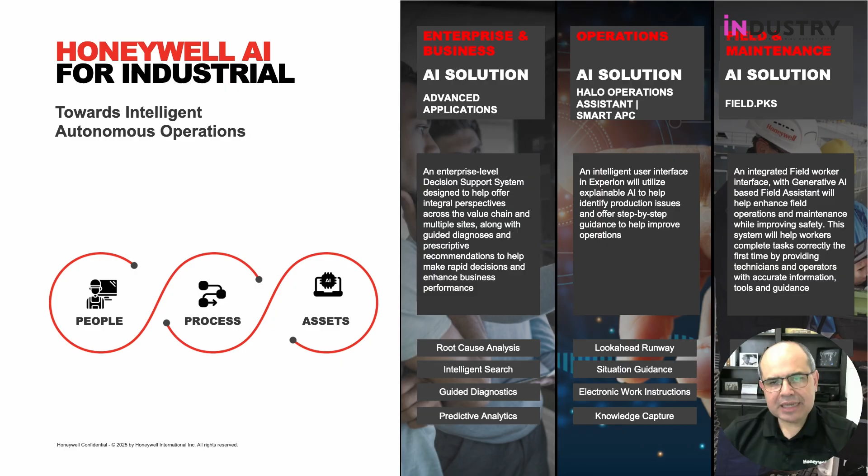What I want to do now is present some examples of AI-enabled applications that provide value for the field operator, for the control room operator, and for the engineer and managers at the enterprise level. Let's start with the field operation, and we're going to talk about one particular application called Field PKS, Field Process Knowledge System. Honeywell Field PKS is an advanced solution intended to support the work of the field operator and the field maintenance technician.

Usually, the operator, the technician, needs to go to the floor plant every day to perform what is called a round. They need to go and check on the status of the equipment, check on the status of the process, identify hazardous or out of normal conditions, and report that back to the supervisor. The supervisor needs to take this information and plan the job for the day and assign that job, whether it's a maintenance procedure or an operational procedure, to the resources available in the floor plant.

But to do this, both the operator and the supervisor require access to information from many sources. For example, they need to access ERP systems to see what is the plan for maintenance, check on spare parts and inventory. They need to access the real-time system to understand the status of the process. They need to go to several documents to look up OEM documentation, operational and safety procedures, etc., and many other OT systems related to maintenance and process performance.

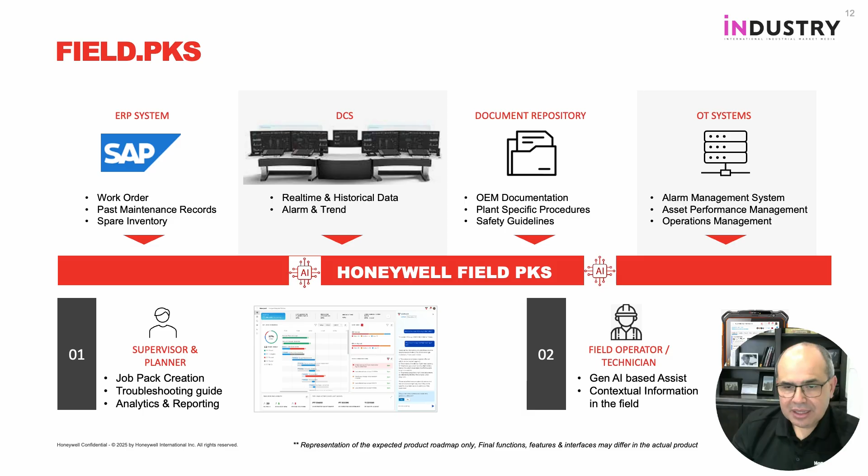What we do with Field PKS is we integrate all the relevant information for decision making from the field operation point of view. And we not only integrate that information, we do it in an intelligent way, in context. We contextualize the information and provide it in natural language to the operator, using Gen AI technology to process and contextualize the information, so the operator can interact with the application in natural language, doing intelligent search and getting the information readily available. We're going to see in a moment how that works.

Let me explain how Field PKS works with an example. Let's say we have a field maintenance technician doing a daily round. The technician is going to go to the field and do an observation across the board of all the assets assigned to his round.

Let's say this technician identifies an issue, identifies equipment with a potential failure. So what the technician is going to do is capture an observation and insert that observation into the Field PKS system.

But to really capture the valuable information for decision making, the field maintenance operator can go and check information about the OEM of that particular equipment, check information about previous failures the equipment has had, and the last maintenance the equipment has had.

So with all that context, the field maintenance technician can raise the observation and put in all the relevant information for the particular situation, including pictures, videos, voice notes, audio, and additional documentation found in Field PKS. So all this information, now contextualized, is going to go to the supervisor in real time.

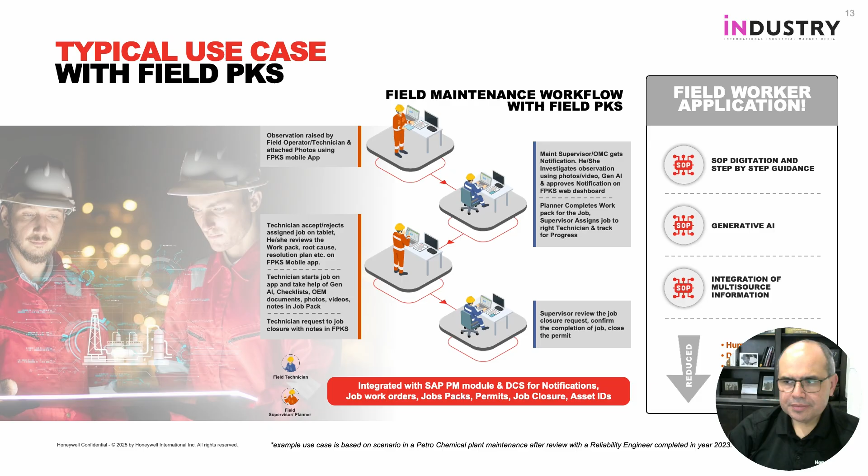More than that, the system automatically generates the job pack, so it can automate the workflows and assign resources. Now what the operator and supervisor have is a companion that is automating all that manual work that has been done traditionally in the past, reducing the time to make decisions to execute the job, and giving all the contextual information to perform the job in an efficient, repeatable, and consistent way.

Now let's move from the field to the control room. Let's go to the second level of the industrial AI solutions. We are going to talk about a solution called Halo Operation Assistant, that is intended to augment the capacity of the control operator at the control room.

Halo Operation Assistant is the next generation of control room operations UX. What we are doing is augmenting the DCS capacity, providing intelligence that supports the work of the control operators. And we have several components here. Let me try to explain.

So here we have a traditional faceplate in, let's say, a mining environment. You have all the equipment here with the level of the variables, the alarms, etc. But then we start looking at different other components that are enriching this faceplate.

The first one is the watch list. The watch list is intended to present the operator with the most important variables based on the condition of the process. That means the system is going to analyze the status of the process, the criticality of the variables, and present the variables that are more critical for the operator. Of course, the operator can select some variables to keep an eye on, but the system by itself is going to present what are the critical variables so the operator can be aware of what is happening.

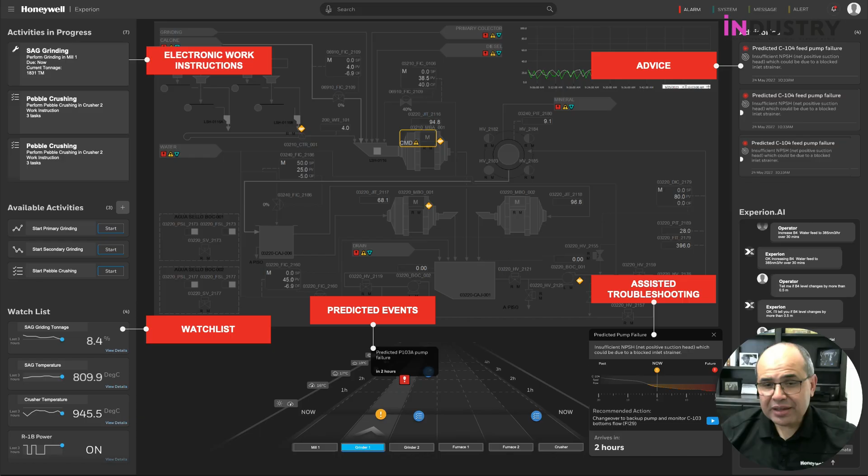With Halo Operation Assistant, we provide those procedures in a digital way. We digitalize the standard operating procedure and present step-by-step guidance to the operator on what to do related to specific operational events. Now we're providing enriched context to the operator so they can know what to do when an operational event happens.

Usually you're going to have some information regarding the behavior of the alarm. Here, for example, the level of one of the variables is increasing and has reached the high level, getting out of the operating envelope. So usually you have the alarm, the description, and the trend, so the operator can look at what happened and decide what to do.

Now with the Halo Operation Assistant and the Smart Alarm Management functionality, we're not only going to present what happened with the variable. The system is going to look back at previous occurrences of this particular alarm and bring those occurrences to present that context to the operator.

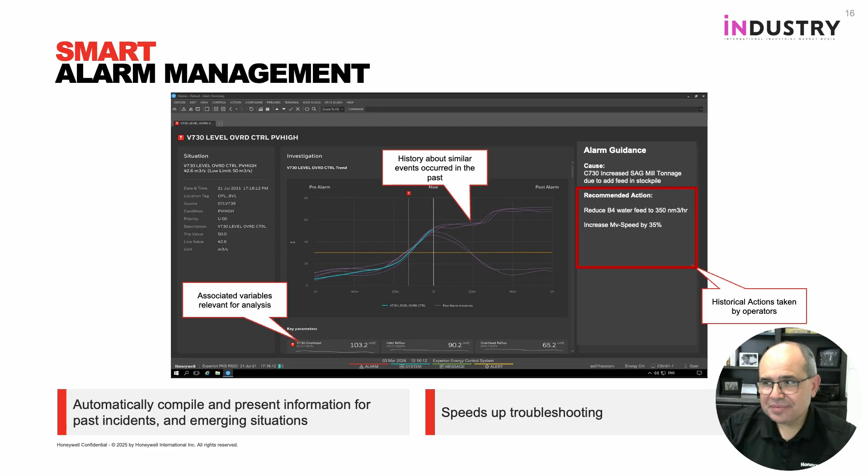Then it brings information about events and alarm logs, looking into the logs to associate whatever alarm is happening with records in the system. We also integrate information about the process flow, so P&IDs and other diagrams, as well as standard operating procedures, safety guidelines, and any procedure documented in the system. We also integrate information from other systems like alarm management and production management systems.

We take all that information and integrate it in context using a knowledge graph. What the knowledge graph does is make sense of the information, and it associates the process with the alarm, with the values, with the actions. So we create what is called a lineage. When an alarm happens, there's a relationship between the variables, the value of the event, the alarm, the event, and the action taken in the past. All of that in context.

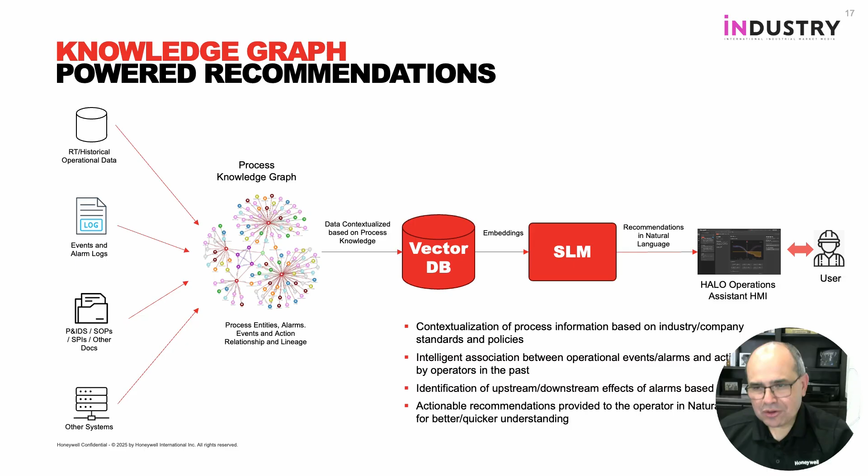Thank you, Cesar. Now let's zoom into the technologies enabling this transformation. Following the idea of technology infusion, we are enhancing our solutions with machine learning and first principle digital twins. We use this hybrid strategy across advanced process control, asset performance management, and event detection for computer vision. This enables real-time decision-making, especially in challenging processes like flotation and grinding.

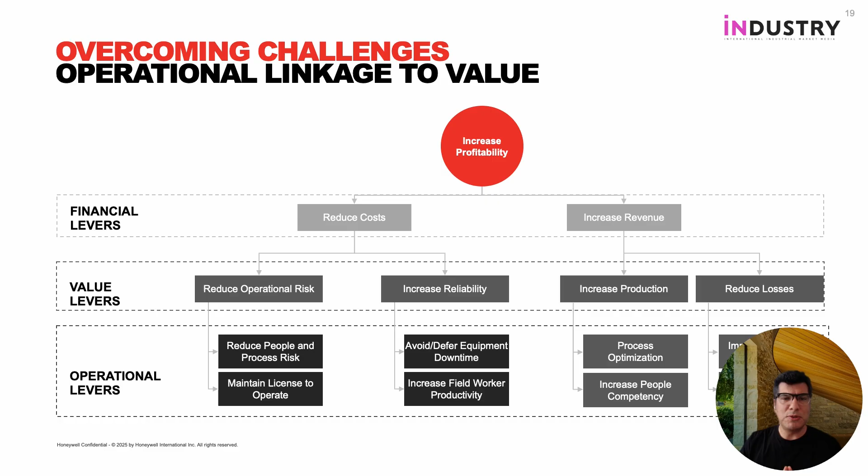First of all, every one of our technology infusion projects follows a business case related either to cost reductions or revenue increase. Now I want to share with you five use cases where we have infused machine learning and digital twin technologies into our solutions.

Let's start with machine learning technology infusion for process optimization. First, let's do a short recap of advanced process control. At Honeywell, we use a control strategy called model-based predictive control, or MPC for short. The main idea is to install this supervisory control layer that is multivariable and helps us reduce variability, giving us the chance to operate closer to our constraints in a safe manner, helping us increase throughput and recovery, and reduce energy and water consumption.

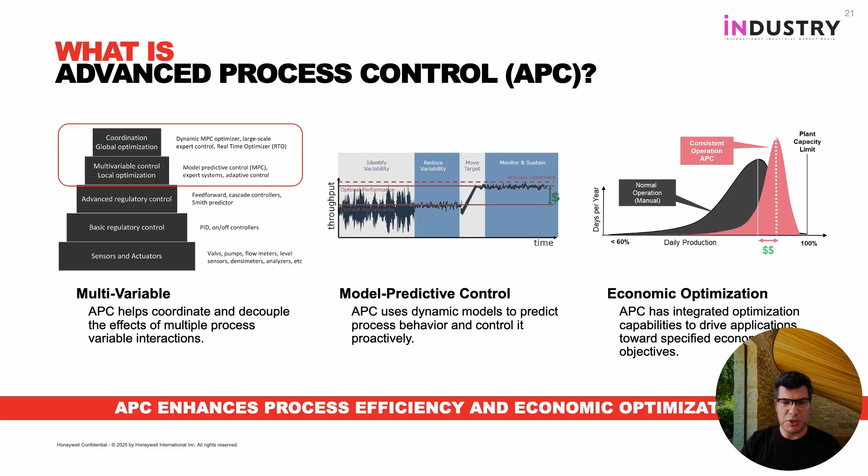So what's next after APC? We all know that mineral processing is complex because it's hard to measure important properties like ore hardness and ore grade online. Ideally, we should adapt our operational ranges or limits based on variations of those variables. That's the main idea of Smart APC Supervisor: use machine learning to adapt the APC applications based on operational modes.

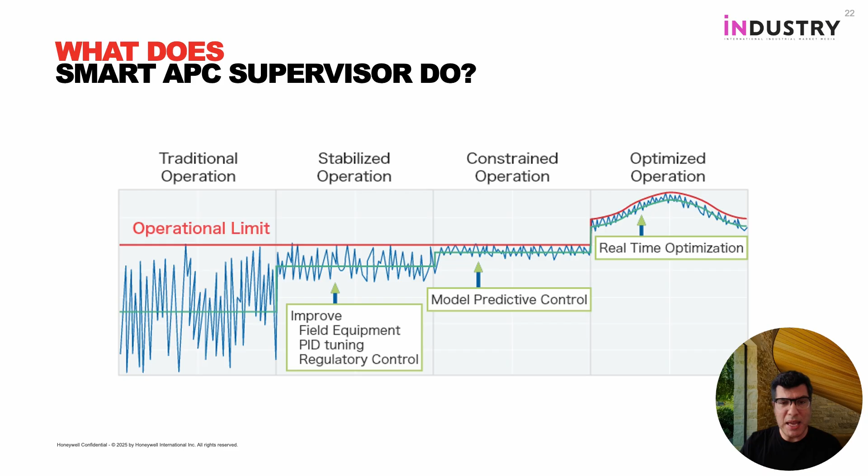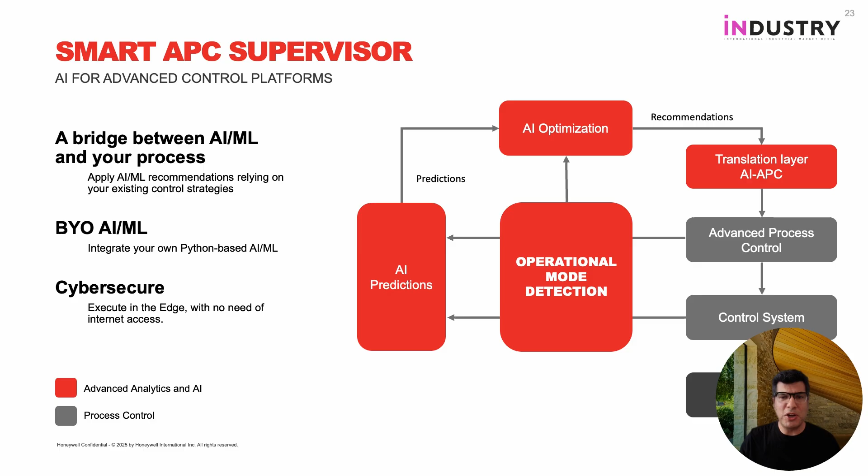So Smart APC Supervisor brings AI closer to real-time decision loops. It integrates machine learning models, AI optimization, clustering-based operational mode detection, and cybersecure execution at level 3 of your control system architecture. Machine learning recommendations are applied with a translation layer to the APC, so you can keep your control strategy and enhance it with AI recommendations through Smart APC Supervisor.

The results speak for themselves: improved recovery, increased throughput, and a faster return on investment. This is a case where we optimized two SAG mill lines that converge into a collective flotation, and the results are incredible. This is one of the nicest cases that we've implemented, and so far, in this moment, we were using interactive recommendations, so the operator received the recommendation and had to accept it or reject it.

But now we are closing the loop autonomously. So the first stage can be interactive, and then we can move towards a full autonomous solution.

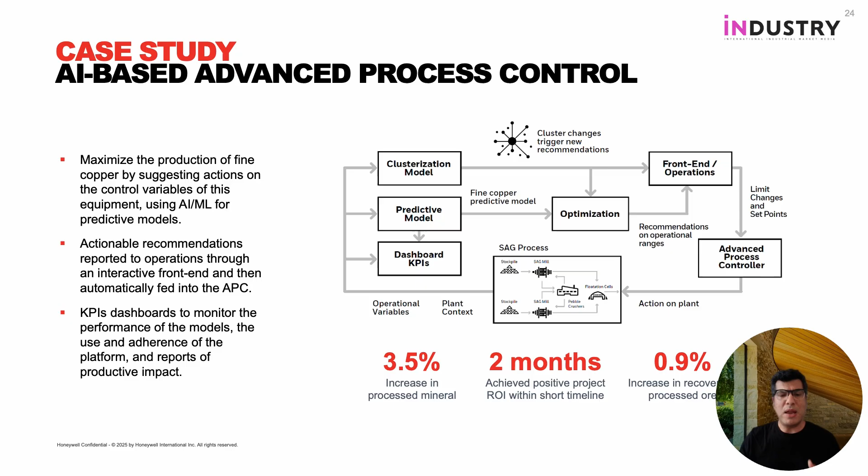And now let's move forward with a machine learning technology infusion use case for computer vision.

Multivariable APC relies heavily on the quality and diversity of the input signals. This is where machine learning plays a crucial role, by infusing new sources of data, such as visual information, into the control loop. Computer vision systems can capture operational features, like froth behavior, bubble size, and texture, that are traditionally hard to quantify or only available through offline lab analysis.

These systems effectively act as intelligent sensors, transforming visual patterns into real-time numerical data. By integrating this information with APC, we can improve optimization performance. For example, detecting subtle changes in flotation froth or conveyor belt loading can feed predictive models that guide the control actions. Using tools like CPlus, we generate structured, reliable, and contextual data from industrial-grade cameras.

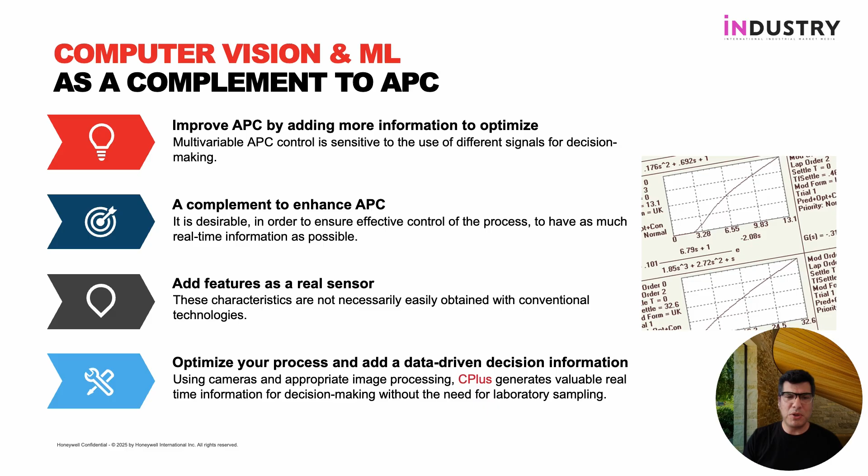This adds an additional layer of intelligence to the plant, one that's visual, data-driven, and fully integrated. The result is a smarter, more responsive control system, optimized not only by process measurement, but by what we can now see and quantify with computer vision and machine learning.

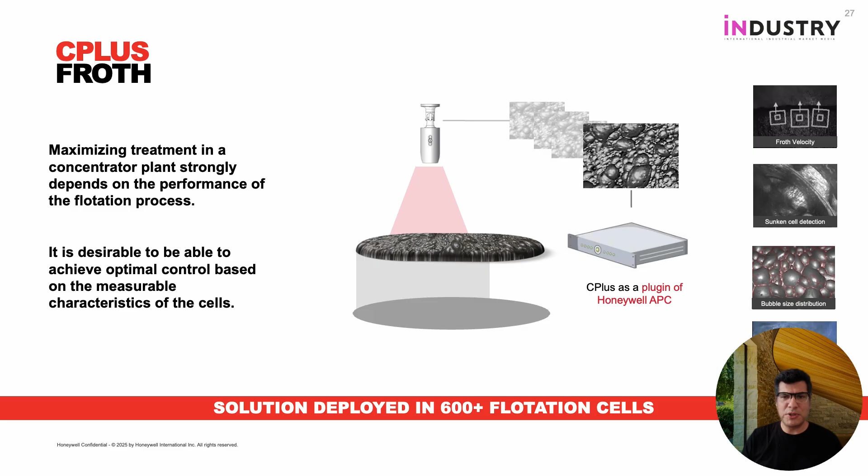In flotation, visual cues are critical: bubble size, velocity, froth depth. This used to be estimated manually or sampled offline. We've used machine learning to detect abnormal situations such as sunken flotation cells and froth collapse. With CPlus, we captured this in real time using industrial-grade vision systems integrated into control loops. And over 600 flotation cells from our customers are already generating benefits from this.

Same goes for rock monitoring. Particle size, belt anomalies, and ore characteristics are now visible to our systems before a failure or a stoppage occurs.

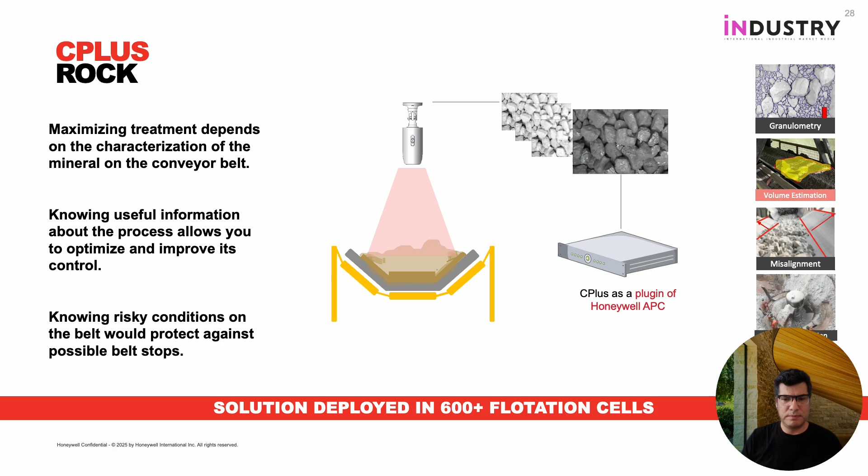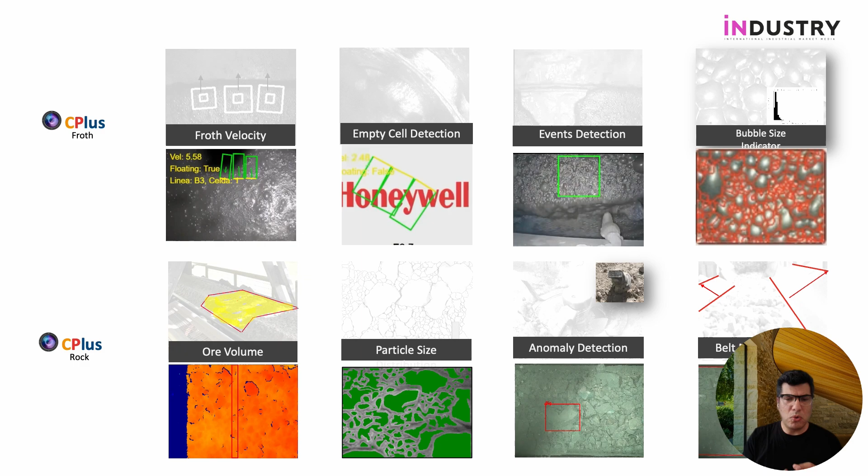And here we can see a capture of our systems, the video feeds, and the information that we are delivering online. In the upper row, you can see some video feeds from the CPlus froth or flotation solution. We have different regions of interest that can be configured depending on the shape of the flotation cell, and we can detect events like when the froth collapses or when the cell is not overflowing. We also have other parameters like texture and indications of bubble size.

In the lower row, you can see some feeds from the CPlus rock solution, and we're also investigating and researching some new features, actually testing it, for instance, ore estimation with stereographic cameras.

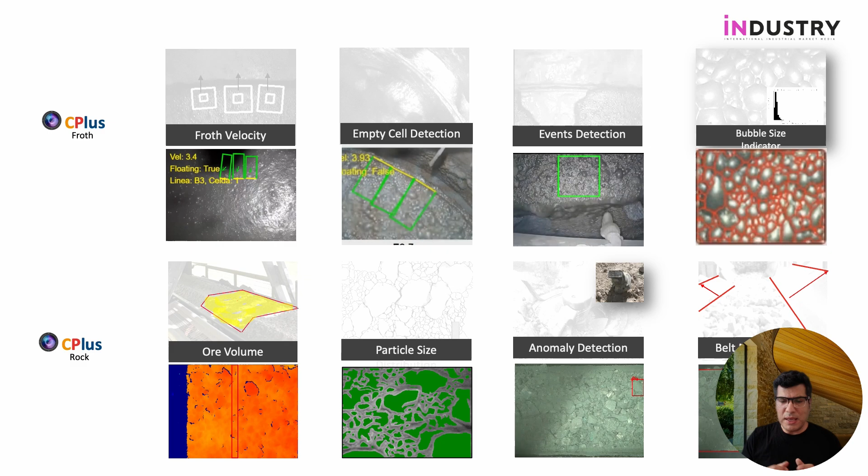Imagine this: you usually have, in the important conveyor belts, mass flow with a weightometer, isn't it? Now with this system, you may have a volumetric flow. So mass and volume - that's density. And if you can estimate density in real time, you can open the black box of what's happening inside a SAG mill, for instance, or a ball mill. We can also identify big rocks that might be going through a primary crusher, and we can detect belt misalignments.

So now let's move forward to another use case where we have infused machine learning technology and digital twin technology into APC.

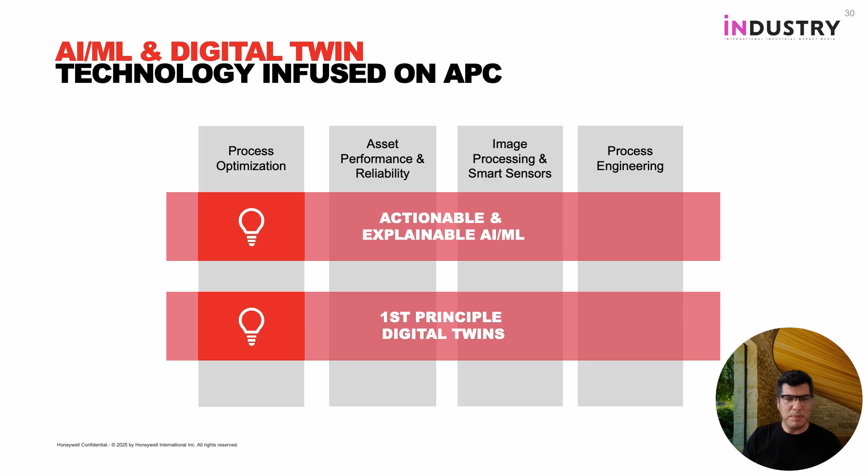Typical uses of first principle models are usually for greenfields, with the OTS, operator training simulators. That's a no-brainer - it can help you dramatically accelerate your ramp up. And it's a solution you can use through the entire life cycle of your plant. So simulation is no longer optional - that's the key message here.

With digital twins connected to control systems, we can simulate plant behaviors before the startup, during commissioning, and for operator training.

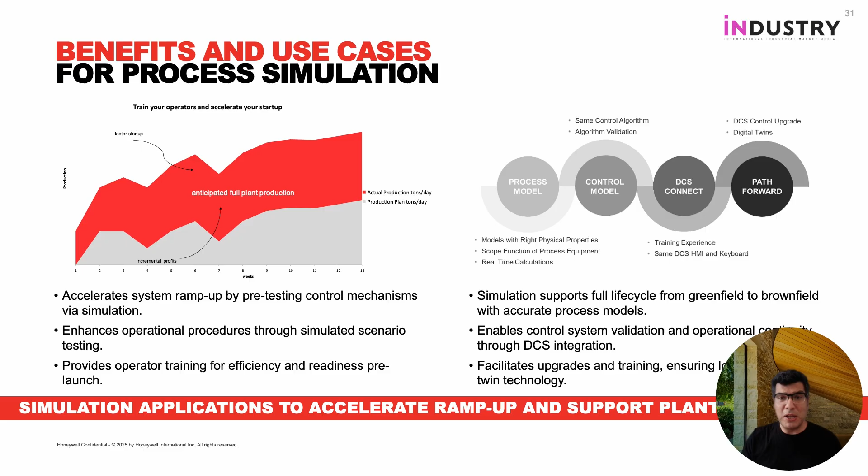And this is a use case, as I was saying, for greenfields - this is the case of Anglo American Quellaveco. We did a high-fidelity dynamic model for them, and we used it for virtual commissioning. We tested everything with an EPC, with a DCS provider. So our solution in this case was operating with a third-party distributed control system, and we developed an early APC. So only two months after the plant startup, they started running in full automatic mode with APC.

Also, before the startup, we trained the operators not only in the use of the control system, but also in the use of the APC. That was a key enabler to start operating with APC only two months after the startup.

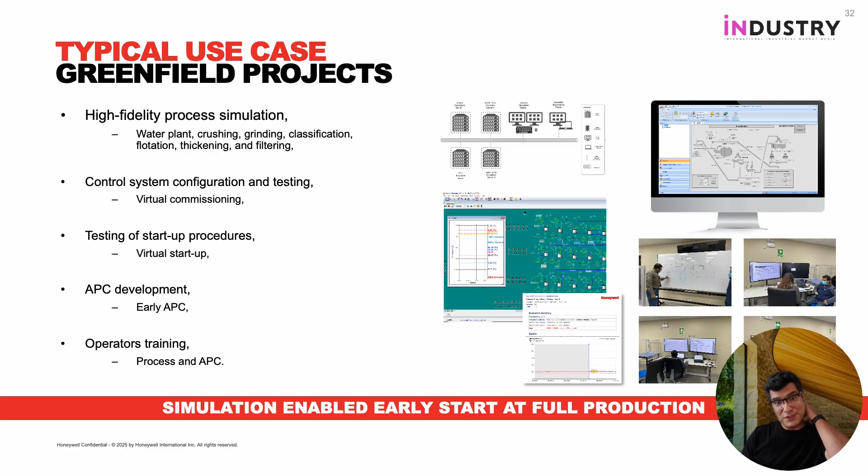What usually happens after the startup of a greenfield is that the dynamic model created for that purpose is no longer realistic. The simulated plant isn't exactly the same as the real running process. That's super challenging because as soon as the plant starts, you want a simulation as close as possible to the real thing.

For that reason, we've included in our UniSim solution a hybrid modeler. When we talk about a hybrid modeler, we're mixing the first principle equations we already have in our processing library with machine learning models. It can be neural networks, or whatever Python, scikit-learn, or PyTorch library or model structure you're using.

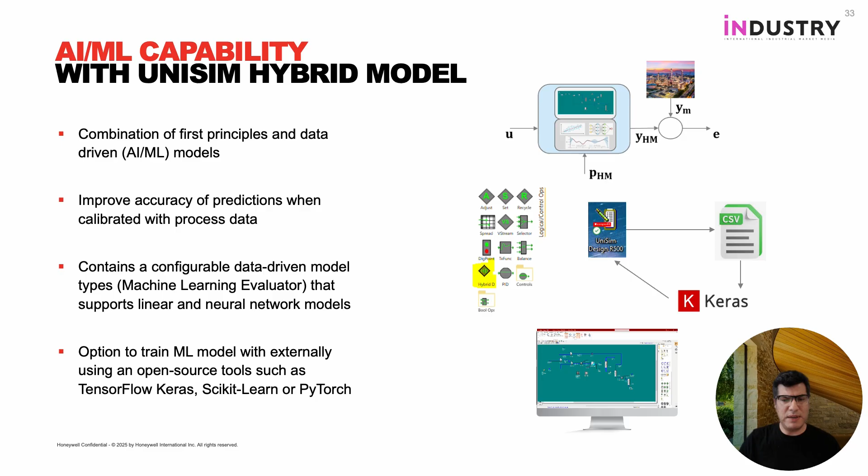The main idea is that you're feeding the model with the real inputs or outputs of your plant, your measurements, and working like tuning your parameters or even modeling that error to create a model representative of the real process. This is a new feature, around for a little more than a year, and we've been using it intensively for real-time purposes, for real digital twins.

One use case is an equipment super common in mineral processing, found in most copper, gold, and iron ore concentrator plants: hydrocyclone batteries or clusters. What typically happens is very nonlinear behavior. Every time you open or close a hydrocyclone, it's not the same whether you're processing the nominal throughput, under that throughput, or with a small or high number of hydrocyclones.

So we usually include important variables of the classification in our APC. We usually have a control variable that's the pressure of this hydrocyclone cluster. We want to maintain the pressure as high as possible for good classification, but not higher than that because it can generate big problems. If you operate with very low pressure, you won't classify as well as in the higher part of the range.

We've actually been doing this for more than two years, enhancing the MPC, the model-based predictive controllers. The models we use in MPC are linear models, very robust, big technology there. But in cases where we used pressure as a control variable and the number of hydrocyclones as a manipulated variable, that relationship wasn't that good, and we had to retune every time we changed operational modes.

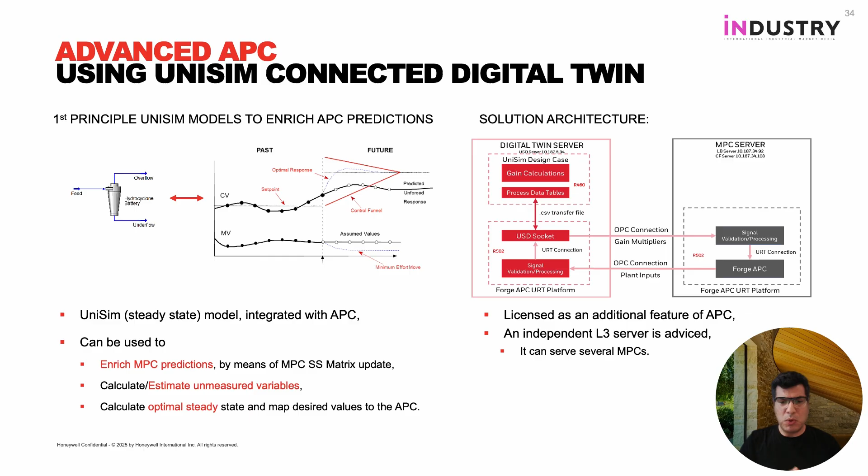Our APC engineers have reported that they no longer have to retune the controllers every time they change operational modes. There were a lot of wizard rules and magic we were trying to implement to tackle that, but this solution is way more elegant, and it's been working for a long time now.

This is a great case study, and lately we've been working with a product we launched last year: our Honeywell Process Digital Twin, where we're integrating all these technologies. These are some screenshots of that solution, where you can integrate a model, integrate that with the APC, and compare the calculated variables in the model with reality.

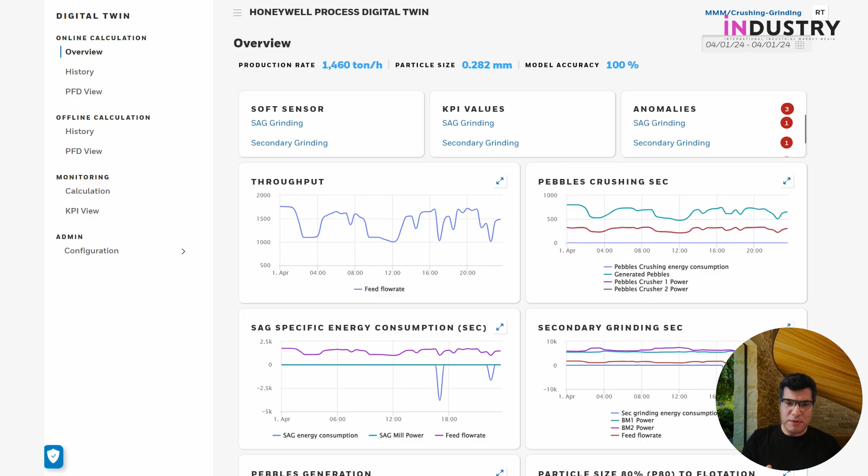You can generate the error, and if you see bigger deviations, you can report that as an anomaly and start investigating the performance of the process. You can actually operate the model, create what-if scenarios. This can run in the cloud or on premise, and you can also run this integration with advanced process control.

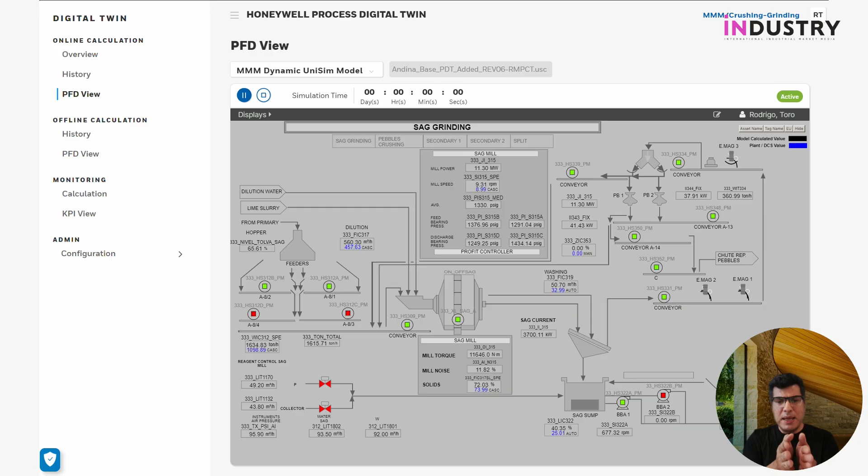Something very nice about this is that you'll always have a real-time instance of your simulation running. It can be integrated with other models, maybe made in Python, and you can have all those hybrid features, run optimization routines, but you'll always have this real-time simulation running. Every time you want to do an optimization or a what-if scenario, you'll take a separate instance, a snapshot that could be in the past or the current moment.

You create a snapshot and you can run a what-if scenario and create a report for the operator. So for instance, imagine you're a process engineer and you arrive at your shift and you see that, oh, maybe I'm sending the mineral a little too coarse to the flotation stage. The mesh is a little high, above the high limit. And I might have some hypotheses.

I can start testing in the real process, but maybe I can run a what-if scenario in accelerated time to test my hypothesis. Or maybe I can program an optimization routine and get an automatic response or recommendation. Then I can check the results and create a report for the operator and tell them, okay, we should do this, maybe add some more water, maybe close a hydrocyclone to reduce the mesh we are sending to flotation.

So we're making decisions based on data, digital first, because we test everything in the digital plant and then we move to the real plant.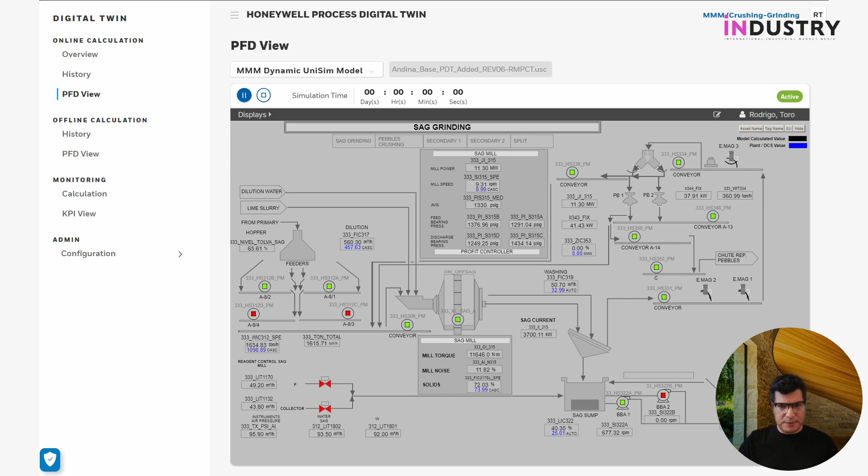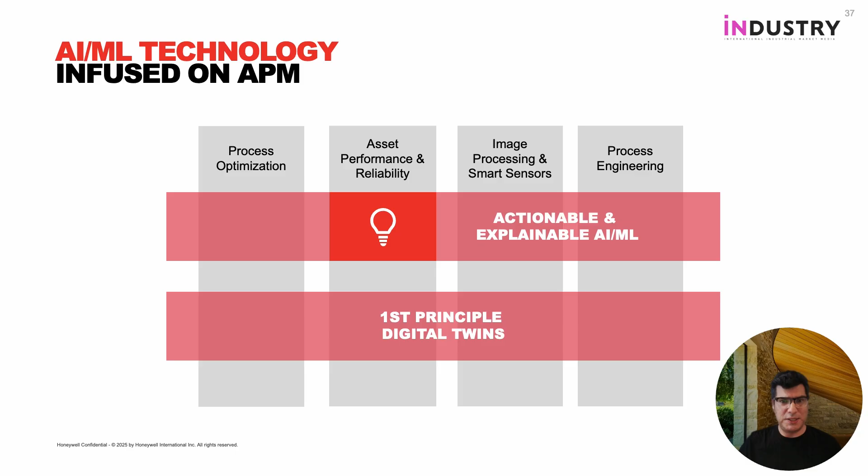Now I want to move to another dimension of this, which is asset performance management. And I want to share with you a couple of use cases. The first one is a technology infusion project, where we infused machine learning into a system for early alerts. The main idea under those early alerts is to try to avoid an unplanned shutdown. That's the whole point. Every time we have an unplanned shutdown, all the benefits that we got with APCs and with optimization are diminished.

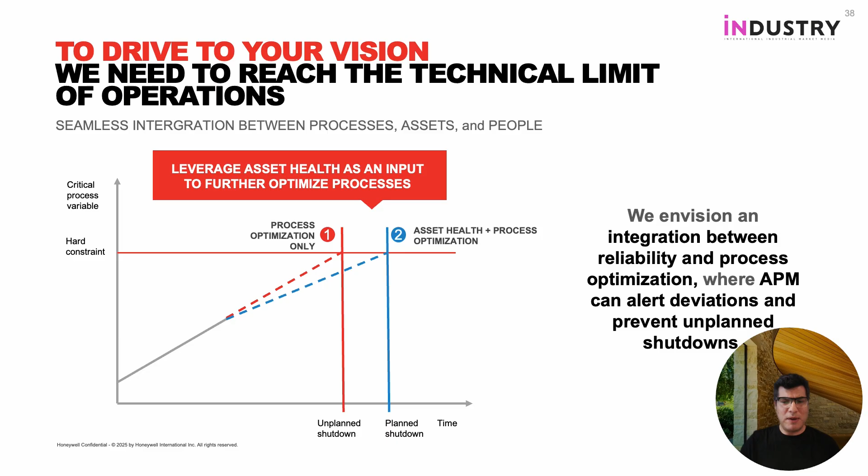So the main idea of having early alerts is to understand situations where you are reaching, or may reach in the near future, hard constraints that may lead to an unplanned shutdown, and make some changes in advance, gain some time, buy some time, to avoid the unplanned shutdowns.

So we have our asset performance management solution. We can deploy it on premise in your control system architecture, usually at level 3, or it can run in the cloud, or it can be hybrid. The main idea of this platform is that it lets you integrate data from a wide variety of sources.

It can be mobile equipment, it can be fixed equipment, and then you can run performance models or fault models. You can run models as simple as something you may have in an Excel spreadsheet, and integrate that in real time with real-time data. Or it can be a UniSim model with high fidelity thermodynamics, particle size distributions, etc. It can be your own model with a Python library, a machine learning model, for instance.

And you have a workflow and a way to understand what is happening, with this data structure for the assets, where you can see the asset and fault tree with nice dashboards. You can also monitor the data in an integrated way, so you're taking tasks that usually were offline duties to an online platform. And you have workflows to investigate deviations and create work orders, which can be integrated to your ERP, etc. So it's a great solution.

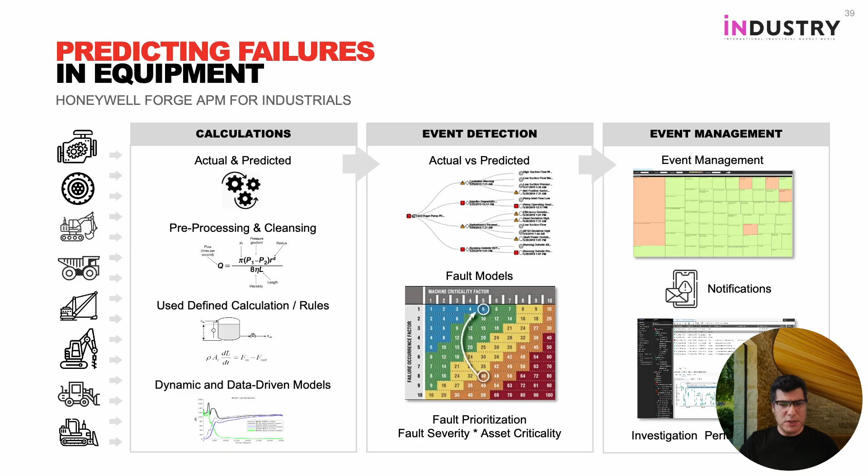In this case, we did a project for one of our biggest customers. They were moving from a plant with two primary crushing plants separated, to a bigger but centralized primary crushing plant. So they were a little concerned because they moved from this sort of redundancy with two primary crushing plants to a single point of failure. Newer plants, better equipment, etc., but a single point of failure.

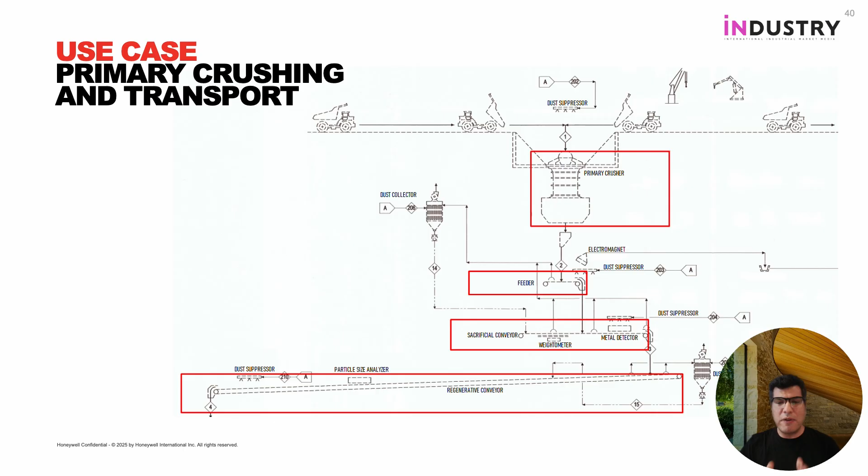So we created an early alert system for them that was also integrated with the operator and the reliability engineer. The idea was that if the early alerts were raising concern within the timeline of the shift, it would be presented not only to the reliability engineer but also to the operator. But if it's something that may happen within a month, it would only be presented to the reliability engineer, because the operator is focused on real time. The type of alerts we implemented were three.

The first two are very simple. The first one is what we call the unforced prediction: what may happen if you don't change what you're doing? If you continue operating this way, this may happen within the next day, month, etc. It's like an extrapolation. The second one was the most simple one: limits. If I violate a limit, I will raise an alert. That's it.

And the third one is a little nicer. It fits within the machine learning theory, and we are using a variation of the principal component analysis that we developed with the University of Alberta, called the moving mean principal component analysis.

So basically, with this type of model, you model the normal operation, not the abnormal operation. You model when the things are happening as you like them to.

So we take all the variables that we know would be important for the model. In this case, everything related to the lubrication system, the conveyor belts, upstream, downstream—most of the data you have.

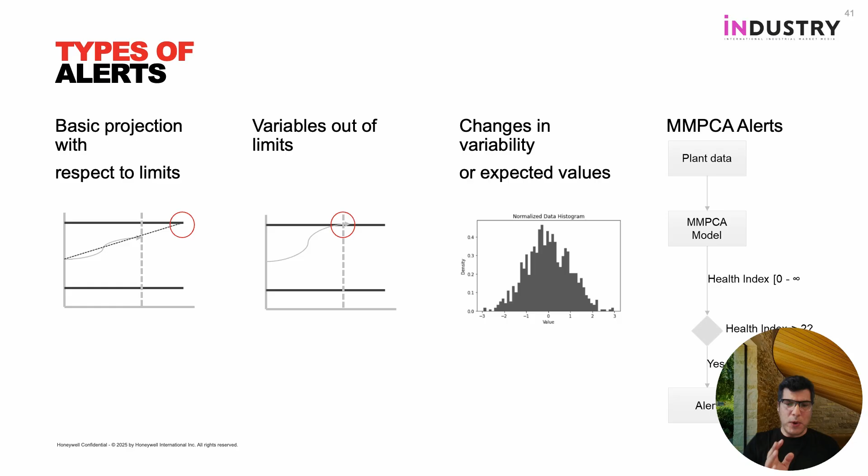Every time we move outside the normal operation, we create a Pareto graphic showing which variables are putting more energy into that deviation, so you can start investigating it.

So for instance, we also have a health index. If the health index is bigger than 2 in this case, we say, okay, something may happen.

And we create an alert. You go to that alert and see, okay, the power consumption is higher than usual, or the pressure inside the lubrication system is lower or higher than usual, a temperature, whatever. So you can start investigating that.

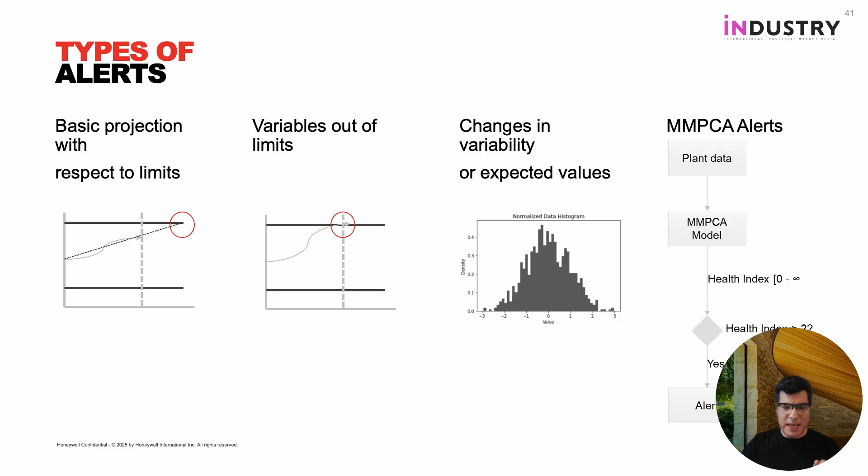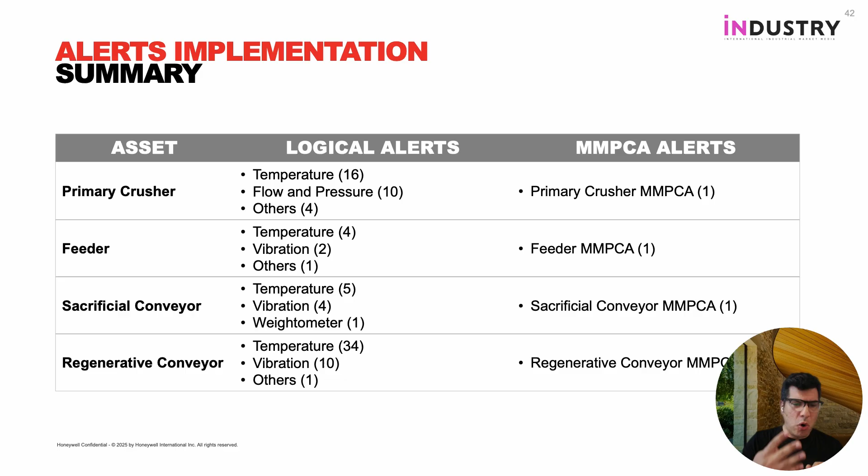That's a summary of the alerts we implemented for this solution. As you can see, four main equipments: primary crusher, the feeder system, the conveyor belt called the sacrificial conveyor belt, and a regenerative conveyor belt—an overland conveyor belt that takes the ore from the primary crusher to the plant.

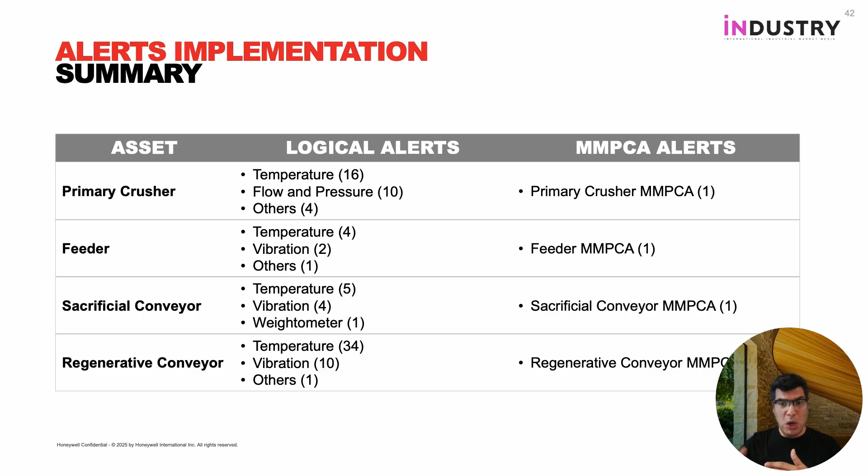We've been lucky in this case, because nothing wrong or bad has happened to this plant. So at this point, it's like an insurance.

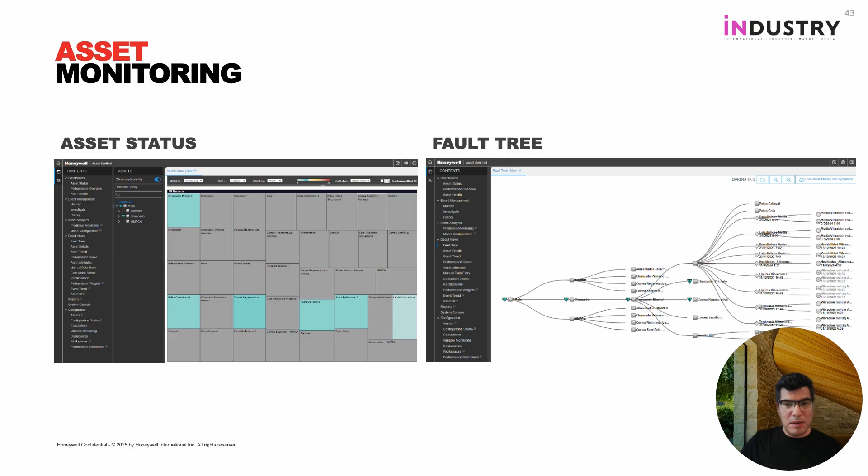But last winter, we saw something interesting. Last winter in Chile, this plant is in the Andes Mountains. There was a lot of snow—it was like an old school winter—and we started seeing this deviation.

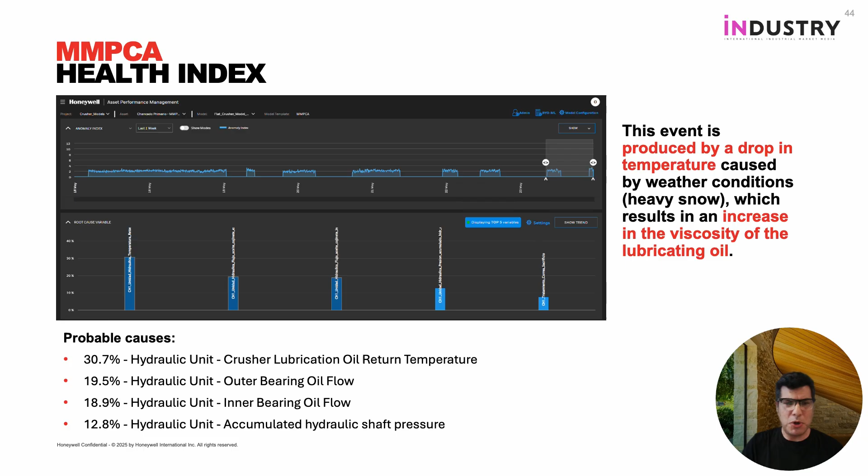It turns out that the lubrication system was giving an acknowledgment of this harsh winter, and that was the reason for the deviation. Nothing to worry about, but it shows you this type of thing.

To start finishing my part of the presentation, I want to share with you the last use case of technology infusion. In this case, it was inside this asset performance management solution, mainly infused with first principle digital twins, but for a slightly different use case. The main challenge this customer had was they wanted to do what-if scenarios. Let me show you.

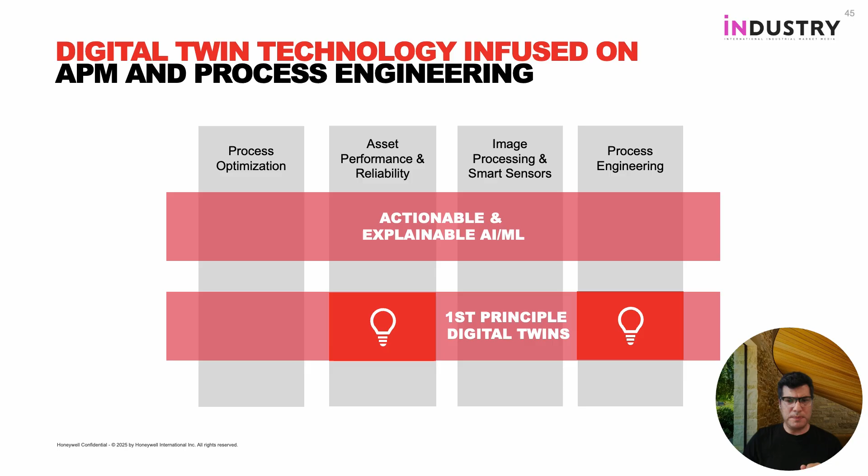They have this roasting plant that goes after the concentrator plant. The main objective of this roasting plant was to take out the excess arsenic that came in the copper concentrate. For that, they had to roast it and could separate and produce calcine in this case. So what happened is that we were a little blind on what was going into the roaster.

They have this nice dome where they were stocking the copper concentrate, with a stacker and reclaimer, and they were doing laboratory measurements before the stock. So when they were reclaiming, they didn't have a real-time or nice way to understand what they were reclaiming, or what the properties of the ore were.

So we created one model in Python for the dome—mainly a data structure that can help the process engineer understand what they are reclaiming. When we stack, we also stack the data from the laboratory analysis in a way, and then when they reclaim, they can reclaim that data too.

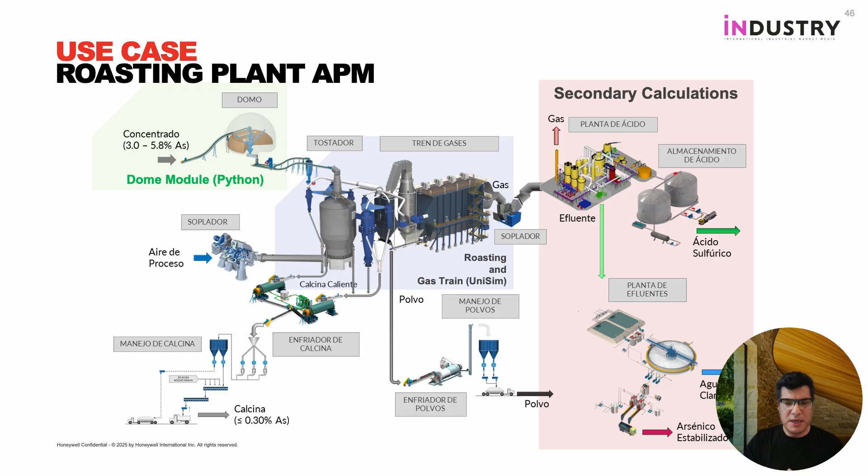This is the dome model—you can see more or less the idea. It works wonderfully because it's a fine dome; you don't have the segregation that you may have after a primary crusher. The main idea of this model is to have this data structure where, when you are reclaiming the mineral, you can reclaim the laboratory data in a way.

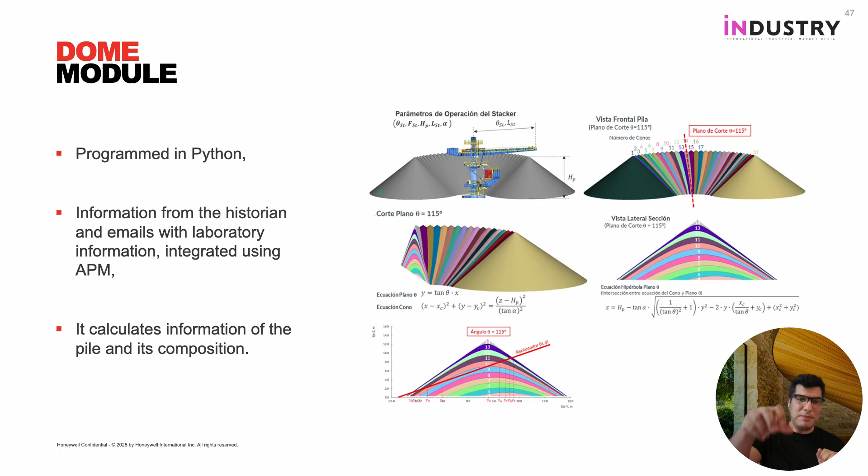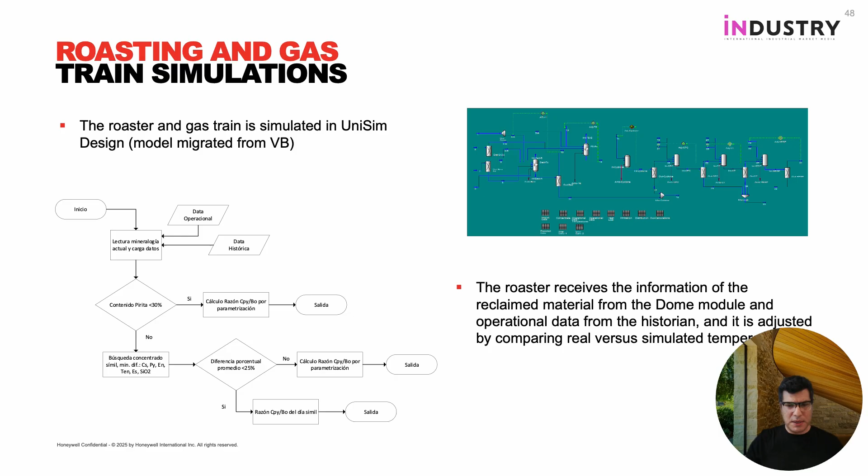Okay, and this was the roasting and gas train simulations in UniSim, and everything was integrated into our asset performance management solution. We created this customized user interface. It was a web application where the process engineer can monitor the calculated information that came from the simulation.

And compare in some cases with the real measurements in the process. Plus, they had the chance to do what-if scenarios. What if I reclaim from this part? How will the roasting plant behave?

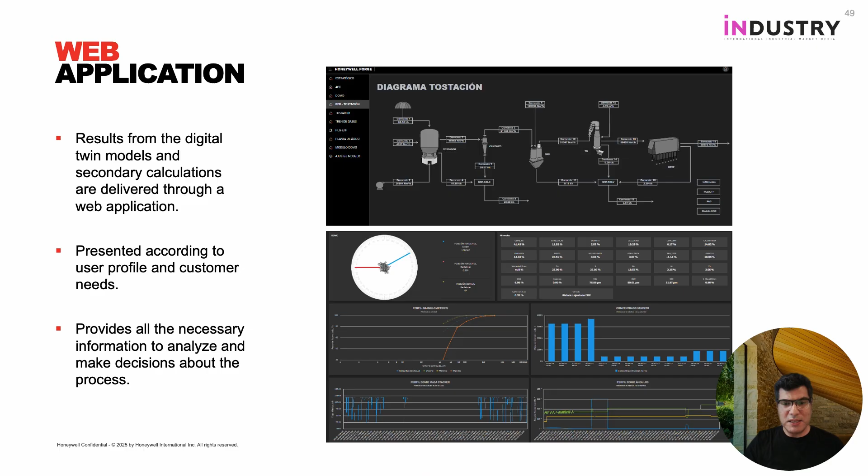At this moment, we are also implementing optimization routines to generate recommendations on where to reclaim to maintain a steady operation. Plus, we're using some of this information that we're calculating with this digital twin to feed forward extra information into the advanced process control. So there's another role there for process optimization.

So we're reaching the end, and I want to share some closing remarks. How we can enhance mineral processing. The idea of technology infusion is super powerful because the end game is not to reinvent the wheel. There are things that are working wonderfully. We've been using PID loops for a long time, and we don't plan to replace them with machine learning. We may infuse some machine learning to tune them online, to adapt them online.

We have the end goal of moving from control to autonomy. We want to have autonomous plants that are more resilient, that are fault tolerant. We know that one of the key elements for that is the intensive use of simulation. And we've been working hard to tune those simulations, to reconcile them with the real-time data to match reality.

So we can have this digital-first solution with the digital plant taking the lead in front of the real plant. And we want these intelligent solutions that give us real, explainable recommendations. We don't want more black boxes. We want intelligence that is actionable. So we want to trust in those models, and for that we don't need black boxes.

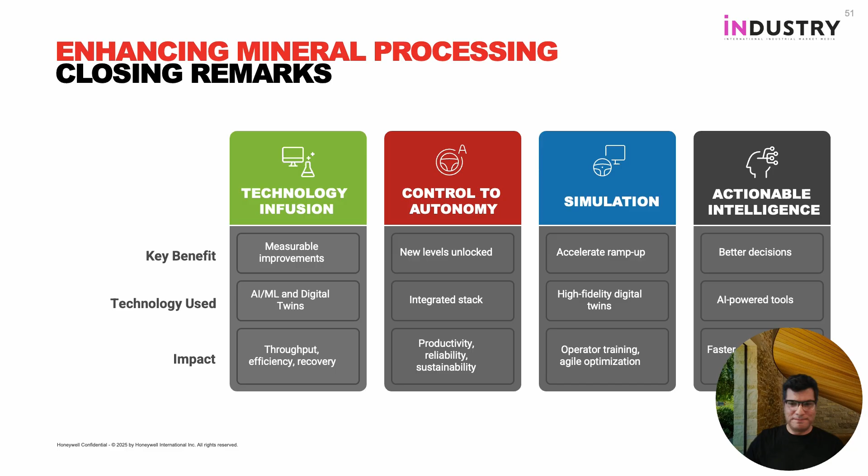Thank you very much, Rodrigo. Just to close, as you could see during the presentation, we have a very rich and complete portfolio of solutions based on AI to support metals, mining and minerals processes, mineral industries. Not only based on technology or techniques, but also based on the experience that we have in the field for many years implementing solutions for this industry.

So if you want to engage with us to evaluate, to implement the solution that we just described in this presentation, there are many touch points, many ways to do it. It can be a typical technology implementation program, a project that we can implement in your company, but can also be a pilot test in one particular area, a proof of concept in one unit, or even a co-development, a co-innovation program. So all those possibilities are open.

So the way we generally do it is we have an initial engagement, typically a meeting or better, a site visit, a workshop with all the incumbents in the process, so we can identify what are the pain points, the priorities, and the typical use cases you want to address. Once we identify those priorities, we define the best way to continue—can be from a POC, pilot, technology implementation, to a co-development program. So in all that spectrum.